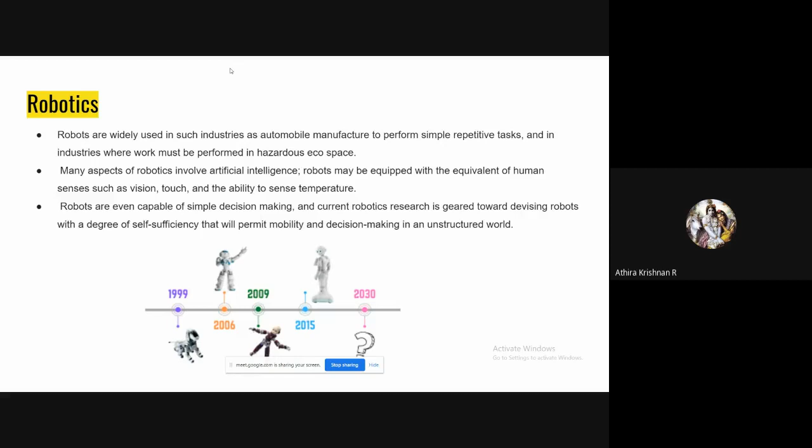This doesn't mean it's not possible for anyone else here - anyone can do that. Maybe if you're coming from a BTech batch, it may not be a single person's project, it can be group work, but it's something like a motivation. I kept it here because you can also think of contributing to society for the right cause.

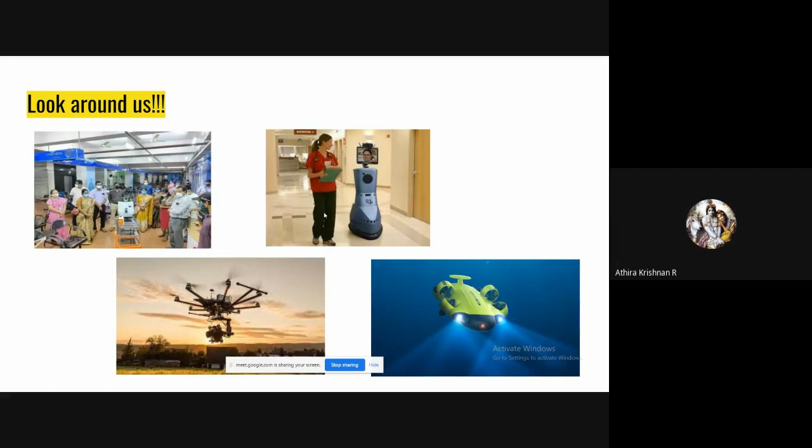This is actually implemented for mining kind of activity under the sea. This robot will go and see which all areas are there, and the robot can capture images, and that can be accessed by people around in the land. That's it, so these are something like what we see around us. This is just a glimpse. I am not saying that this is the only thing.

Next, let's see what is industrial robotics. Being a student, we see so much of projects coming around us, and all these also contribute to robotics.

But there is a big bridge, a gap that we always see. People who study in college are not ready for industrial projects. To bridge that gap, we need to know what is industrial robotics.

It's not that different, it is also robotics only. But the difference is that being in an industrial environment, deploying it will have so much security concerns to be taken up. There will be so much emergency concerns, space limitations, because there will be people working with the robot. So it can't just be implemented there, and once it goes wrong, getting into that error and solving it.

That kind of approach won't work in an industrial environment, because if anything happens, all the blame comes to the organization. We are replacing n number of people and implementing a robot, saying that man cost can be reduced, they can make some kind of benefit when they compute man cost and man hours. So there should be that efficiency in the robot to complete the task in the proper way, the most efficient way, in the right time.

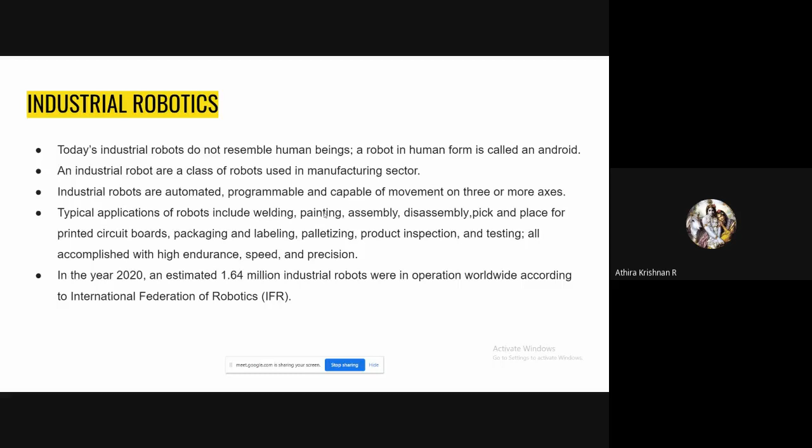I would say for industrial robotics, I also got a chance to work on a warehouse robot for Tata. There it was meant for carrying a payload of 1000 kg, and stacking it in the right place. This is something like what I have from industrial robotics.

Now let's see what we have as the dominant robotic projects done over the world, and then we'll come down and see what is the trend in humanoid robotics.

That's Sophia. Sophia is not just a humanoid robot - don't expect everything and anything from Sophia. Sophia is something like a feminine, touch kind of robot. It has two different kinds of movement.

Here in this video, I have kept something like wheeled kind of navigation. I hope you are able to see the video - here you can see it's moving very smoothly, right, because it's moving on wheels.

But Sophia also has movement with biped locomotion. The problem is that getting that balance in all circumstances is a difficult scenario. So they gave a choice for people to check and use based on the space where they are implementing it, and regarding Sophia there are so many research efforts.

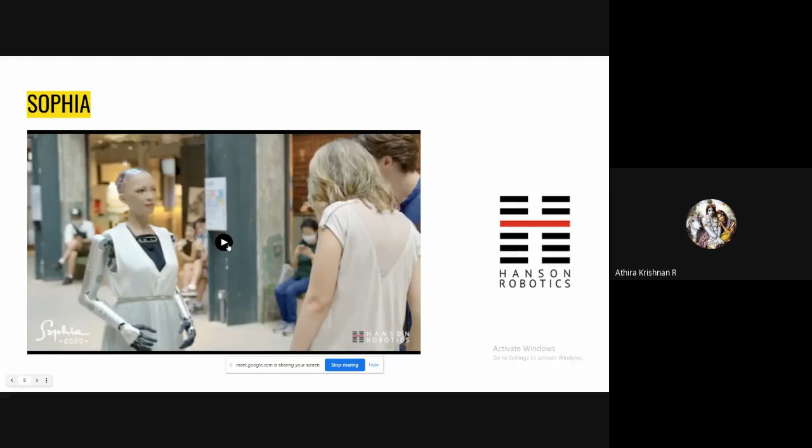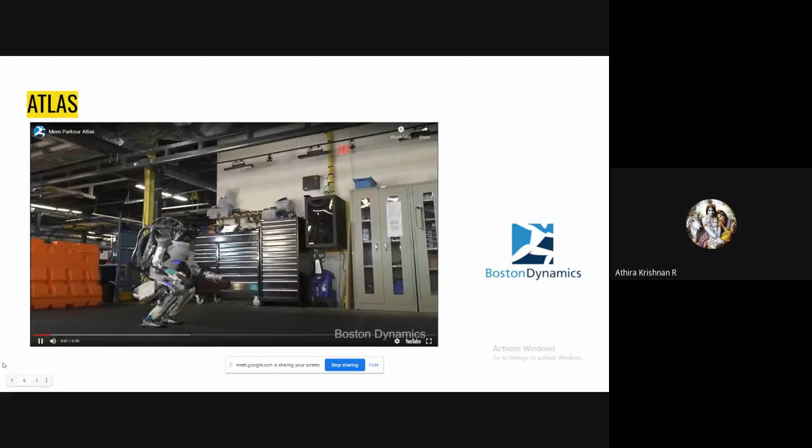Now let's see Atlas. Atlas is a humanoid robot that was developed by Boston Dynamics, a biped kind of robotic project. It was started as a rescue and search operation for automation perspective, but today it is the peak or best example we have in our world to showcase a humanoid robot. It uses hydraulic actuation, because of which it has that capability.

I don't know whether all are aware of actuation. Actuation is how it is getting powered - it can be done electrically, pneumatically through air pumping, or through hydraulic actuation. Here we use hydraulic actuation, so more power is actually used.

Normally hydraulic systems are very huge, but here they have used a very compact form of hydraulic actuation, because of which it is able to have that small human kind of figurine. It has about 28 joints for the entire humanoid structure, and at any point of time, it is able to plan a motion with any of the joints. That is the importance I would say - if you try stopping a particular joint, it will try to make use of some other joint and complete the action. It is very intelligent, I would say.

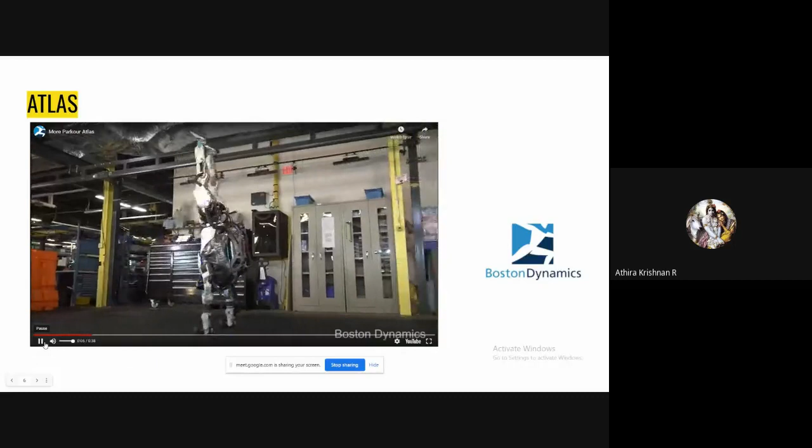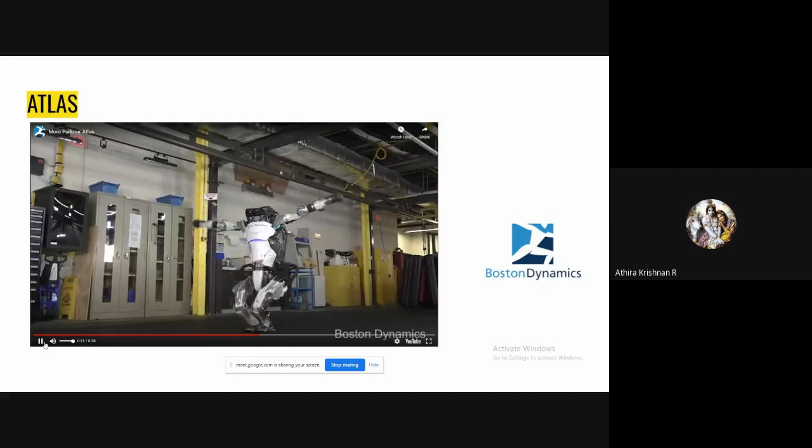So this is the latest video that was released by Boston Dynamics in 2020. And currently they are no more a separate unit - they have been taken up by some other group.

Now let's see something - I think all will be aware of a master slave kind of architecture. So that kind of activation is being used in Ocado technology. Ocado technology is something like an automation perspective.

It is not complete, because whenever we say something like a robot, everyone has a feeling it is something like a humanoid kind of robot. This is not a humanoid kind of robot. This is an actuation robot where small units, like a swarm, work together. It's something like a warehouse kind of actuation in a retail segment, something like Amazon, but not as widely established - a smaller one. It's a group that produces autonomous vehicles and supports online grocery businesses, helping to expand their consumer business. That's it basically.

I'll show you the video anyway.

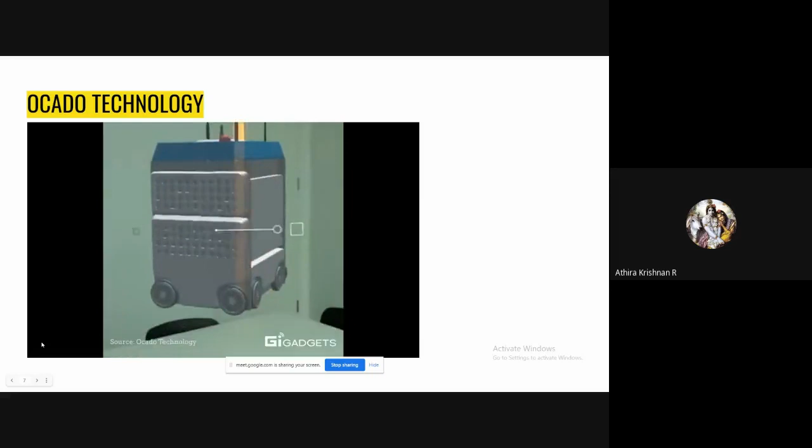So I think you must have seen how they used a suction kind of pressure to complete the automation. This is something like a very new project from Samsung, called ChefBot. In our tech team also, we thought of implementing something like this, but the problem is the acceptance we get when we say something like a chef kind of robot - it's better to do something else. That's the main thing we see from our project approval team. But this is now actually in the market from Samsung Group.

Normally, when it's lunchtime you're gonna walk over to this - actually two manipulators, two sets of manipulators you can see there. It's able to grasp, pick, and so on, and they use the Samsung application through which they get personalization for the food you want. You can even suggest the amount of salt to be added, the amount of butter to be added, and so on. That's the kind of automation they are providing.

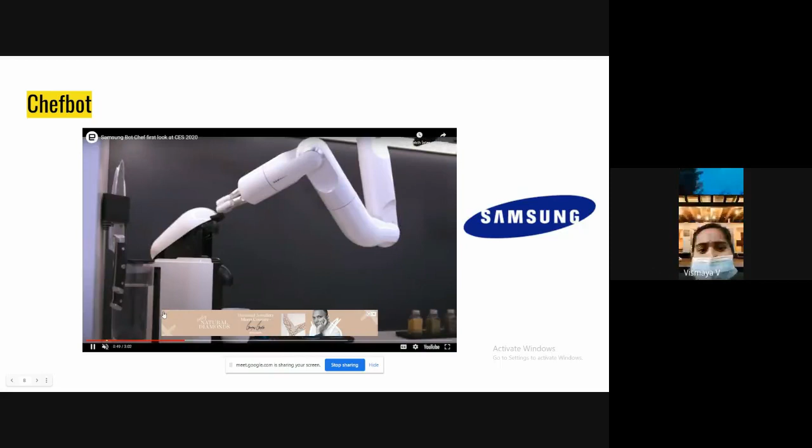But the problem is currently it is very slow, because it needs to be very precise, and if it makes a mess it can get into another issue. So currently they have done it in a very slow motion. You can see how slowly it is moving, and how cleanly it maintains the environment. So this kind of actuation is currently available.

This is something like a product level. I hope everyone has seen something like a dosa-making robot, idli-making robot, from our own Indian products - we've seen so many as part of projects. People have done so many things, but this is a product level from a company. It has been announced in the last few months, I would say.

Normally when it's lunchtime you... okay, so this is about ChefBot.

Now let's go into some simulators. We saw the front end thing, how it looks, how beautiful it is - everything is there, but the problem is how you make it. Before making anything, you need to test it in some sort of simulator. So what are the actual simulators used for robotics is a big question. In robotics especially, you need simulation, because the cost of robotic motors and components we use, even sensors - anything - costs too much. Because of which you can't just spare anything. Maybe you're starting with a budgeted project and getting into failure multiple times, you might run out of budget.

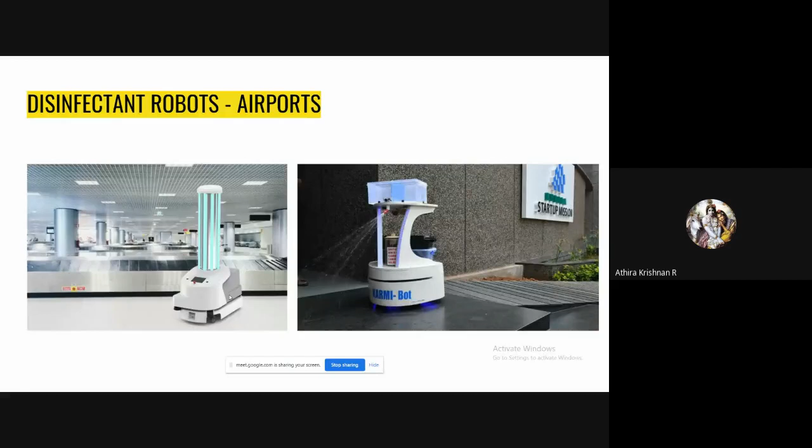So this is actually for spraying sanitizers into the area through which it is moving. You can see it's very evident that it is spraying the sanitizer on the go as it moves. So this kind of robot is available for disinfectant purposes, especially towards the COVID scenario, I would say.

Then coming to hospitality robots. Earlier, hospitality was completely a manual job, because we couldn't think of a system sitting there for a hospitality kind of thing. But now the scenario has changed. Like Pepper, now even Asimov's Saya robot in Kalamassery - there are so many. Pepper is not Indian, but these are getting into the market. They are multilingual, can support and talk to people, give polite answers, right answers at the right time, and help people get things done in an easier manner.

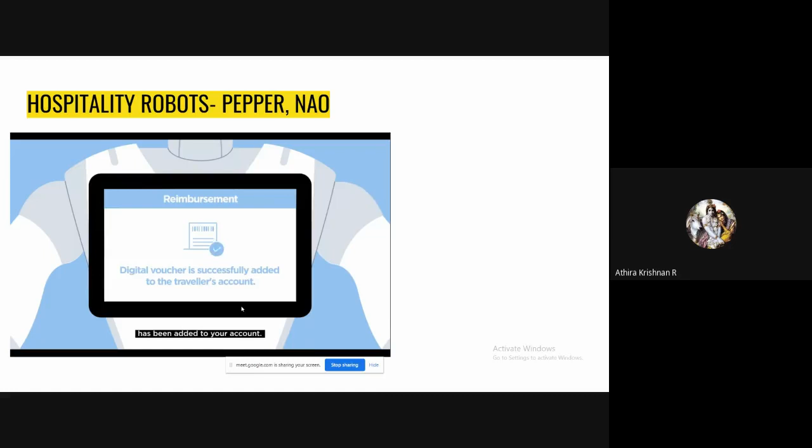Check in your flight? I can help you with that. Your check-in is successful. Would you want to check in your luggage? I will print the sticker, please put it on your luggage and leave it here. Hello madam, it's not my day, my plane got delayed. Sorry to hear that, I will make it quick. Could you please show me your boarding pass? A 25% discount on your next flight with us has been added to your account. We apologize for the inconvenience.

So this is about the hospitality kind of robots that we have.

This is from Tata Group, the same lab where I'm working, TCS Rapid Labs. This startup is called RADA, done for Vistara. This robot is deployed at Delhi airport, done a bit during the COVID time. It's for interacting with people, like what we just saw with the Pepper robot - able to communicate with people, give guidance, get them motivated, move around, and give them some kind of presence, for engaging and hospitality.

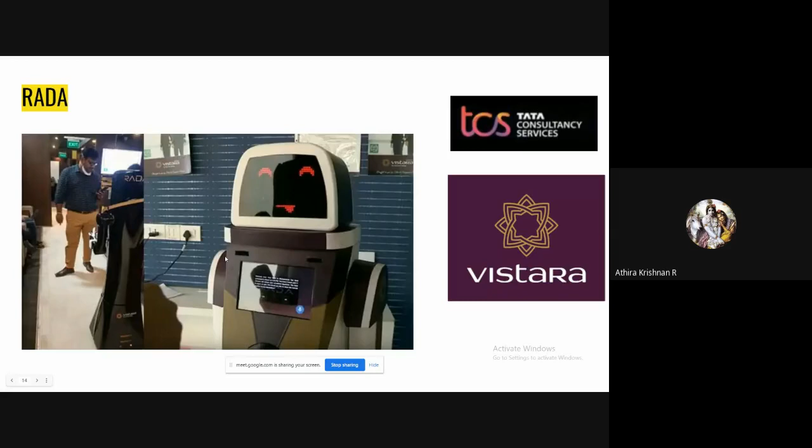So this is RADA. Then next is our Indian government mission - this is done by the ISRO Bangalore team, the Vyomitra robot, planned for the Gaganyaan mission. It's a human figurine kind of robot, and they have planned a silicone face skin for that appearance too. You can see the arms are also quite powerful. The first look is already released, and the mission is being planned - fingers crossed.

So next is a new field from robotics, actually a combination - it's part of AI. AI has supervised learning, unsupervised learning, then comes reinforcement learning. What is supervised learning? From known sets, how to predict the result. If you know A is for apple, B is for ball, then if you see A again, you can say A is for apple. That's supervised learning - there's some supervision or learning done before the actual testing.

But next is unsupervised learning, where you are not aware about the scenario. You are given something like a dash for apple, and in that scenario you have to go and learn what could be the right approach that can actually be mapped to apple from the possible scenarios. That is unsupervised - there won't be any kind of training beforehand, that is, a data set won't be there.